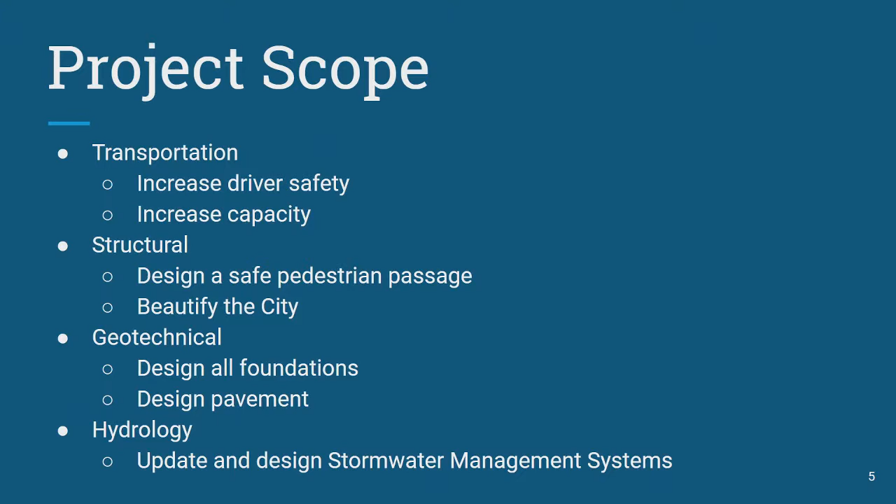Secondly, we were tasked with designing a safe pedestrian passageway through this intersection, which will be done through a bridge. The geotechnical aspects of this project are designing foundations and pavement for the new roundabout. And lastly, the stormwater management systems for the intersection needed to be updated.

So I wanted just to give a brief overview of how the current intersection operates. A lot of you probably use this intersection and maybe even used it today. This is actually a still from drone footage of the current intersection. Some things to point out that we're choosing to update with the intersection: for one, to the east here, you can see this long queue of cars waiting to turn left.

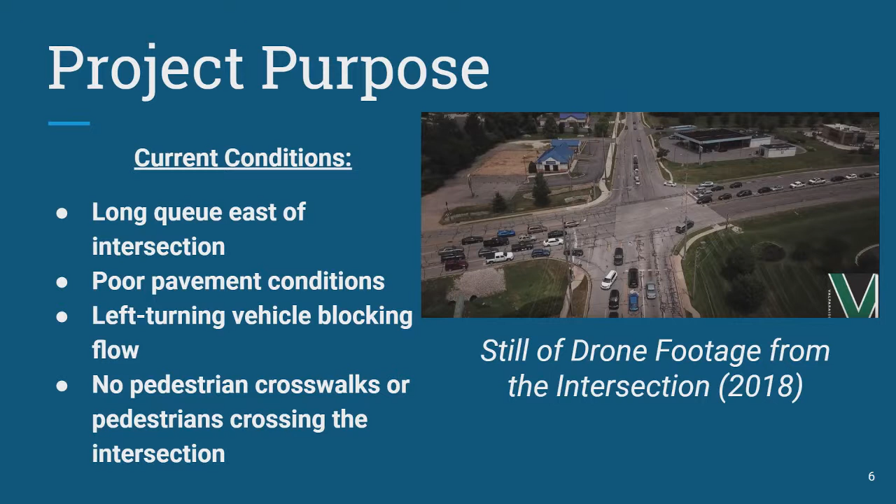You can see the poor pavement, which I'm sure a lot of you guys are used to here in Indiana, unfortunately. To the south, you can see that just off the page, there is a car that's trying to turn left that's actually blocking the flow of traffic, and it backs up into the intersection. And lastly, you can see that there are no pedestrians using this intersection. So all of these things are going to be remediated in our design.

So with that, I'd like to introduce the transportation part of this project. So why I chose to update this intersection to a roundabout, and a lot of you are probably thinking, why not just redesign the intersection? Why even make it a roundabout? Well, for one, using a roundabout, it's safer. As I said, there's a lot of crashes in this intersection. 37% of all crashes will be reduced because of this roundabout.

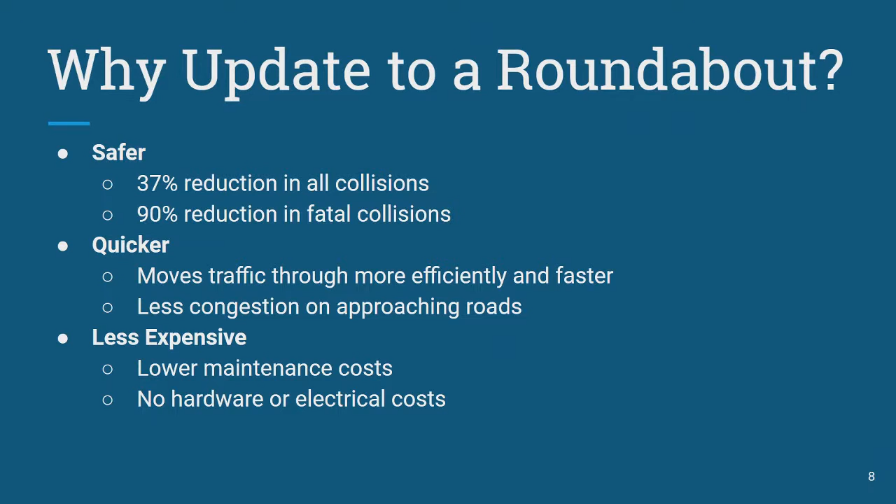The crashes that do occur will be at slower speeds, and they will be more rear ends than they will be T-bones. Also, roundabouts are quicker for the flow of traffic through the intersection. It's actually more efficient. And also, they're actually less expensive than typical signalized intersections because there are no hardware or electrical costs of the signals, and the long-term maintenance is actually lower.

So here's our layout design for the roundabout for this intersection. Just some things to note: the alignment of the roundabout ties in really well with the current road alignment. There are brick medians, as you can see, on all four approaches. This will prohibit that left turn movement that I was talking about, so vehicles can't block flows of traffic, which could then block the intersection.

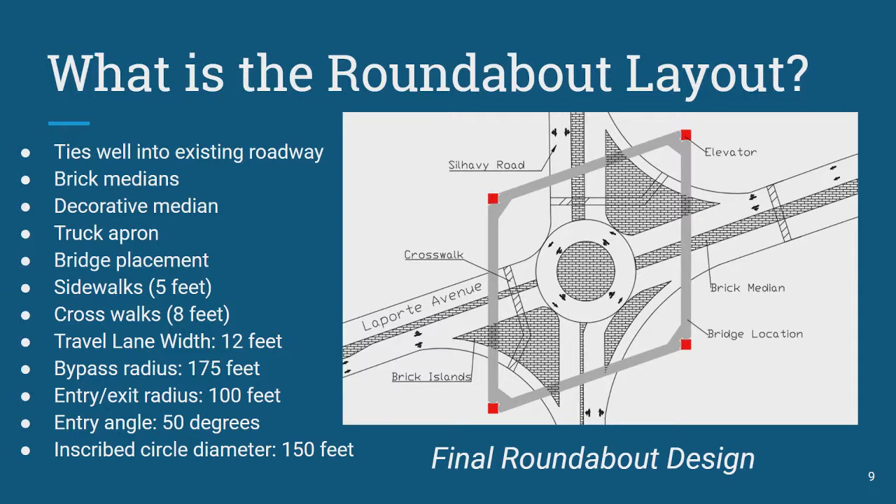There's also a decorative median in the center, which we'll use to also help beautify the city. And also there's a truck apron that many of you guys probably know about, that way trucks using the roundabout can mount the curb if they need to. Just some other things to note: this gray box is the bridge placement that our structural engineer will talk about, and it coincides really well with the roundabout design.

And just some dimensions here that I put just so you guys can see, but all of them comply with the informational guide on roundabouts. So just to give you an overview, how will this roundabout operate? We have this roundabout. How's it going to operate for a motorist? One thing that's checked with roundabouts is the fastest path.

Basically, when a motorist approaches the roundabout, they have 5 options of a turn movement to use in the roundabout. And we check to see what speed these vehicles will be traveling based on the geometry of your roundabout. And really, all this just shows that for all the different options, a vehicle wouldn't be traveling more than 30 miles per hour through this roundabout, which is very safe.

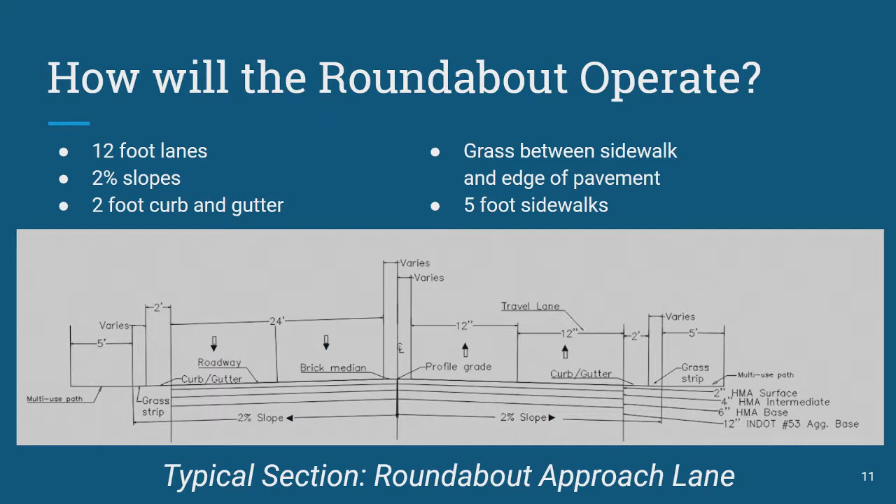I also just want to show you a quick typical section of an approach lane to the roundabout. Just some things to note: the lanes are typical 12-foot lanes. There's a slope on either side of them. There's a curb and gutter. There's a grass strip, and then you have the sidewalk. So all the pedestrians trying to get to the bridge around the roundabout are safely offset from the roadway. And with that, I'll pass it off to our structural engineer, Hannah.

Hello everyone, I'm Hannah Misch. I'm going to present the structural report. And to start the structural report, I'm going to give a background of what I considered before I came to the conclusion of my bridge, because you might see it and think that is kind of ridiculous.

So starting with preliminary design, our design criteria provided to us is that it needed to be ADA compliant, and that's compliant with the state. It needs to be handicap accessible, but also they wanted us to have a maintenance vehicle be able to access the bridge, to take snow off, clean it up and everything, but we ended up scrapping that criteria because it was really hard to design for. The bridges would have to be a lot bigger, wider, things like that to accommodate that weight. And we also considered safety, pedestrian safety, but also vehicle safety, location, connectivity, aesthetics, and constructability.

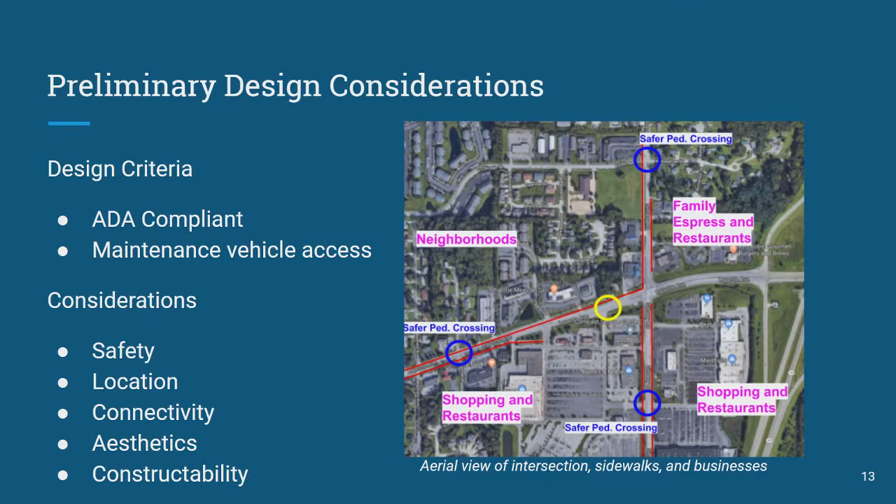So in this image, I included a view of our area, what we're trying to connect to, where the current pedestrian crossings are that are safe, because as we know, our current intersection is not a safe pedestrian crossing. And then I also have in red the current sidewalks where people can walk now. So we really wanted to connect the neighborhoods to the shopping centers, which is kind of why I settled on my design. Some of the things we considered was a truss bridge with a ramp system.

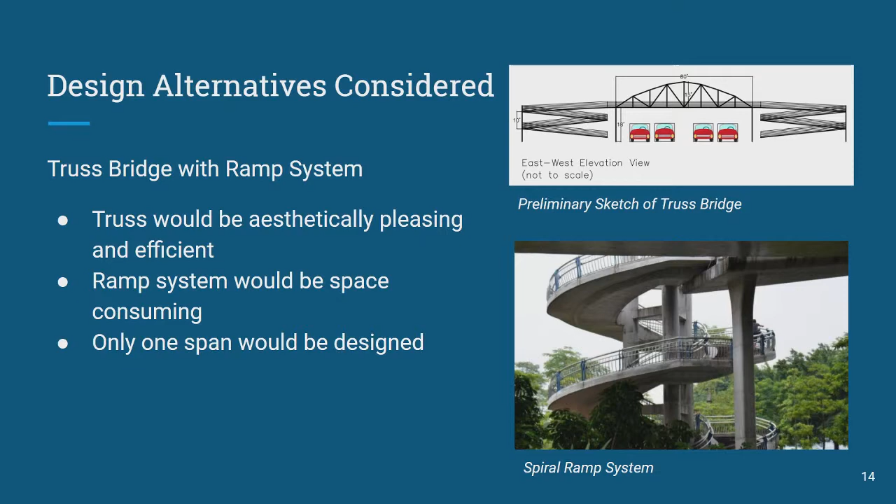The ramp system is ADA compliant, but because the bridge had to meet a certain height requirement, the slopes up to the bridge had to be at least 5%, but you'd really like them to be smaller than that. So the ramp would have ended up taking up a very large footprint, so we kind of threw that out, and also we only would have designed one span, so you can only reach from one side of the road to the other, and I just didn't think that was enough for what we're trying to get accomplished.

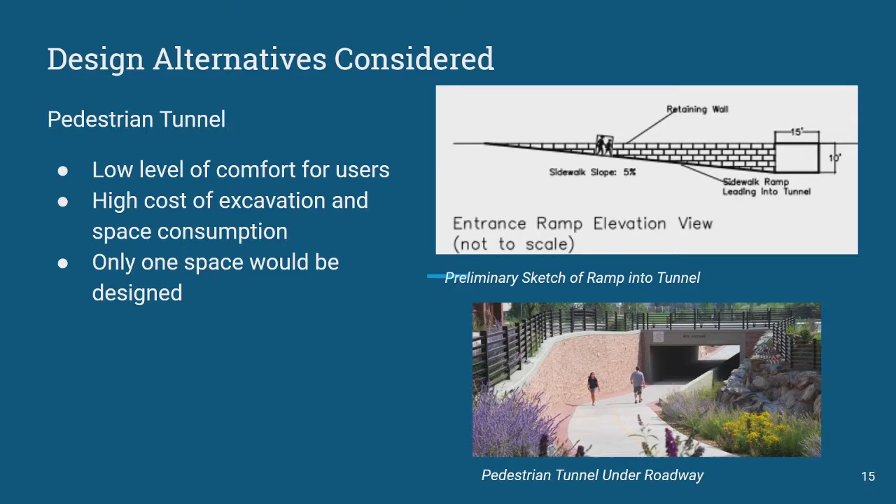So then we considered a tunnel. The tunnel has a low level of comfort for people using it. Tunnels are usually dark, so you have to have them a certain size so people don't feel cramped in them, and lighted and things like that. Also, the thing about tunnels is there's a lot of excavation involved. The construction would have been very extensive, and also, unless we wanted to do multiple tunnels, it only reaches one span.

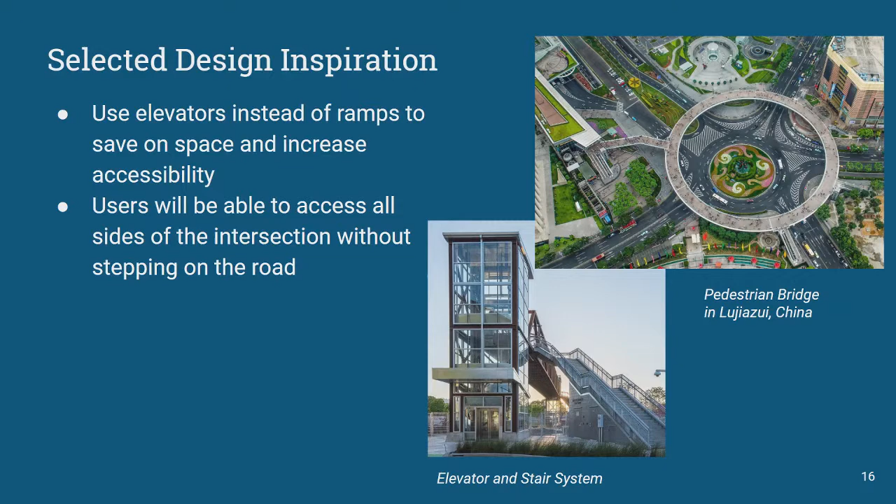So this is kind of what I was looking at. I was like, we're doing a roundabout, so why not do a roundabout bridge? I've never designed a circle bridge before, and it turns out I'm probably not going to learn that in my 4 years here, because that's much more grad school than I can do. So I'm like, how can I reach all four sides and still have it look really interesting? So then I started looking at that bridge, and also elevators to fix the space issue with the ramps. What I considered is 4 bridges.

This is very constructible because it is one single span, very long. We can construct each side one bridge at a time, and only shut down one entry to the road. We could just tie the bridge into the columns very easily, and that way we can connect the elevators, and everyone can walk around the bridge to all the sides. Each span is 200 feet. In order to design this bridge in the time that I had, I made all spans identical. If we had more time, I would have been able to make some of them different.

That way we could minimize the footprint a little bit, but I couldn't do that in a semester, so this is what we did. So for the material, I'm not gonna go too far into my analysis, even though that's what I spent my time on, because that's not really gonna appeal to my audience. So we're going to talk a little bit about the aesthetics.

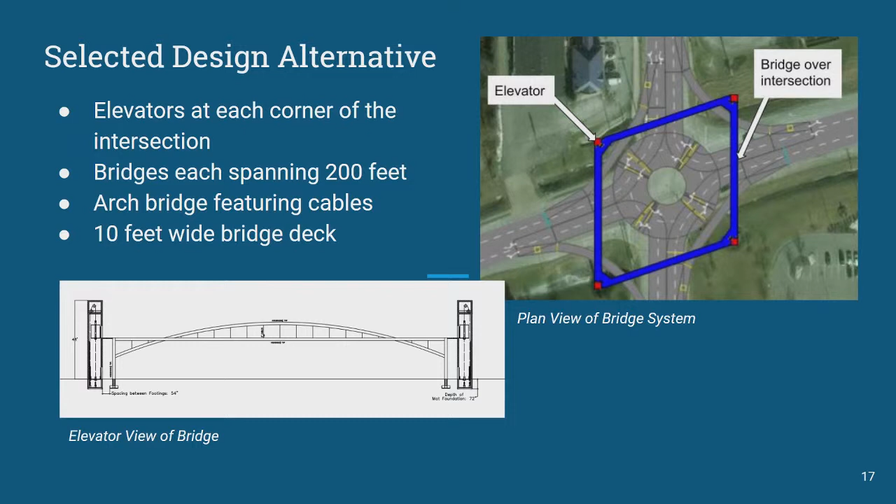I chose HSS sections, which are like squares or rectangles. That way the bridge has a really clean look. If you go back originally to the bridge design, that arc's actually very slim. From the top of the bridge deck to the top of the arc, it is 10 feet. That's not a very tall arc. So I wanted to keep the entire view of the bridge very slim and appealing. That way it's not hugely distracting for the drivers.

So I did HSS sections, I chose weathered steel, that way we can give it a really nice industrial look, and also there's no maintenance involved with weathered steel. You don't have to paint it, so we don't have to worry about that, and it gives it a really cool vibe.

And also the bridge deck, I designed corner decks around the elevator, so there'll be a deck connecting the elevator eventually, but there's decks so that we can set benches on there, people can wait for the elevator, they can kind of hang out there and look at the cars going through the roundabout and things like that. And I'd like to introduce the geotechnical report.

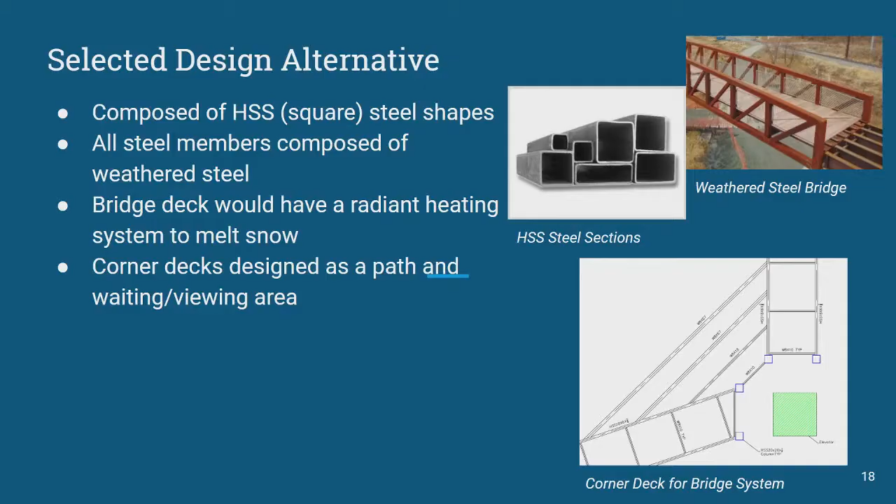Okay, now let me introduce the geotech design. For the design criteria, all the foundations were designed to follow ASCE 7 and ACI 318R-14 design code. And a factor of safety of 2.5 was used in this design. And the designed foundation will not settle more than 1 inch. And also angular distortion and bearing pressure were considered.

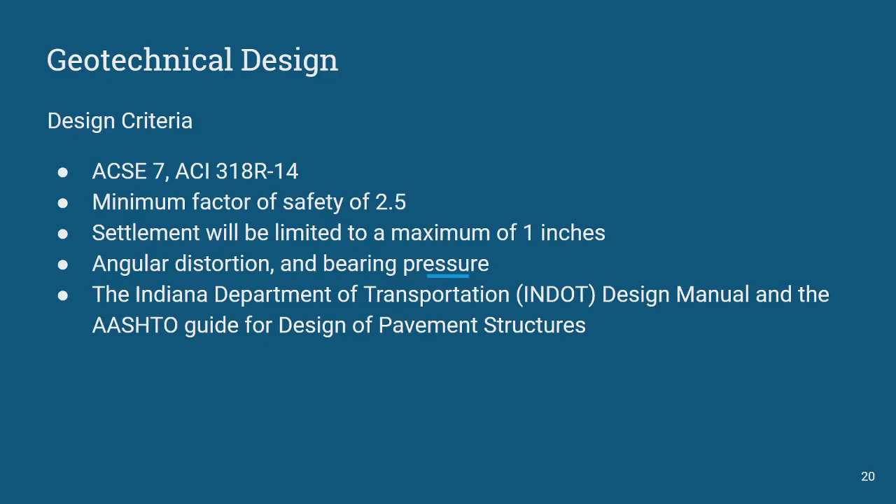The angular distortion is the differential settlement between 2 foundations related to the spacing. And the bearing pressure of soil is its ability to carry load of structure without excessive settlement. Also, the pavement design will follow the INDOT design manual and the AASHTO Guide for Design of Pavement Structures.

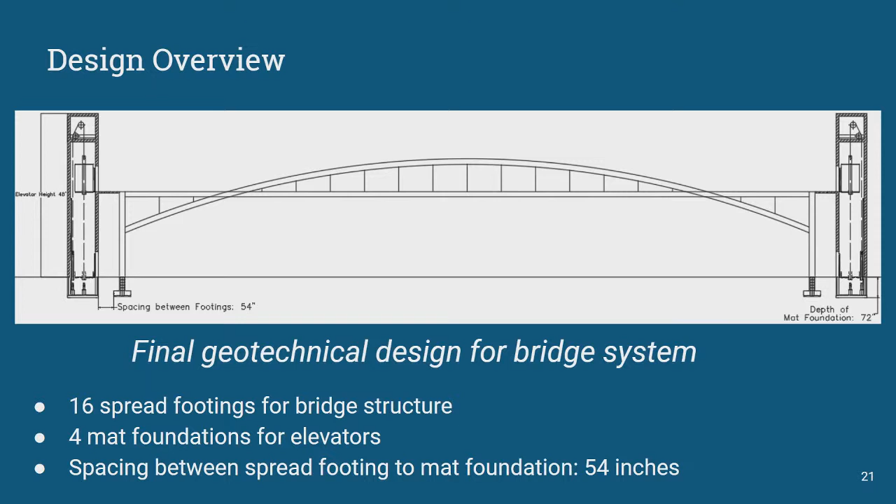Here is the final geotech design for the bridge system. A total of 16 spread footings will be used in the bridge, and 4 mat foundations are required for the elevators. For constructability, all the spread footings were designed the same size, and all the mat foundations were designed the same size. Spacing between the spread footing and mat foundation will be 54 inches.

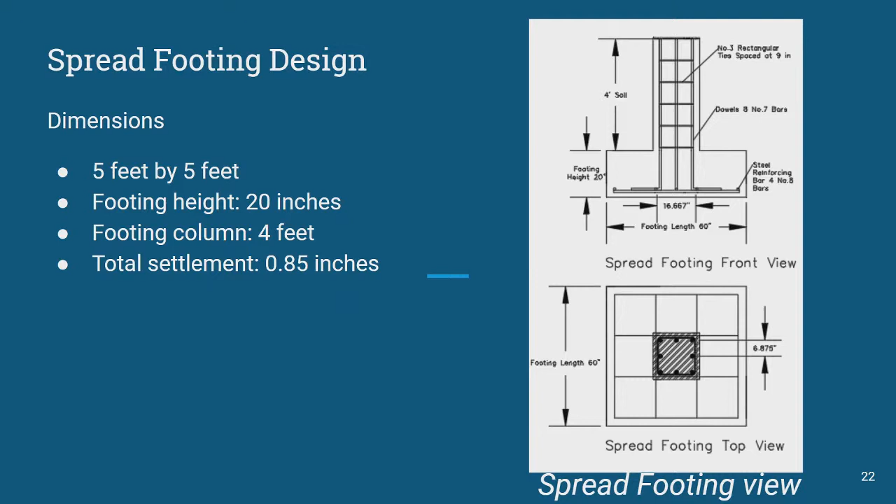For the spread footing design, based on our structural engineer's assumption of the structure load, the dimension required for the spread footing will be 5 feet long by 5 feet wide. And the depth of footing will be 20 inches, and the column will be 4 feet. This size footing results in a total settlement of 0.85 inches, which is within the 1 inch settlement constraint.

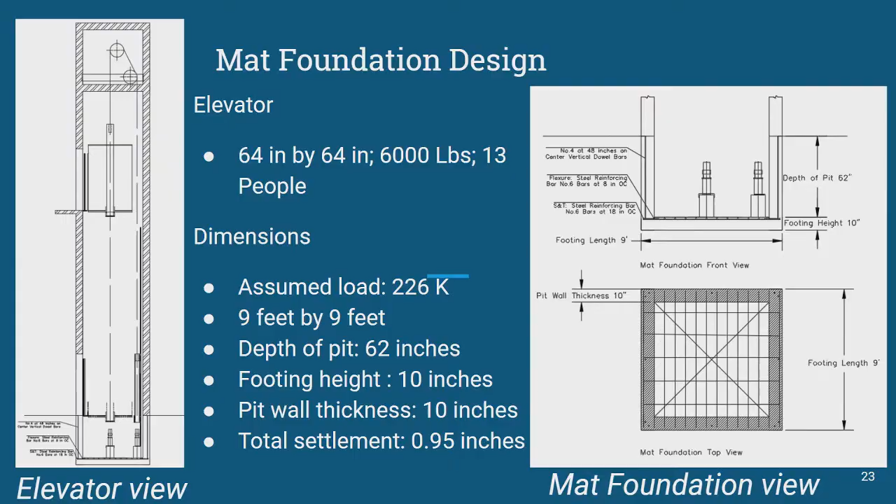For elevators, we will purchase an entire elevator system. The elevator car will be 64 inches long by 64 inches wide, and the total equipment weighs 6,000 pounds. Also, for this elevator, the maximum passenger capacity will be 13 people. Based on this elevator size, there will be around 226 kip force on each mat foundation. The dimension required for the mat foundation will be 9 feet long by 9 feet wide.

Also, the depth of pit will be 62 inches, and the height of mat foundation will be 10 inches. That means the total height of this mat foundation will be 72 inches. Also, the thickness of the pit wall will be 10 inches. This mat foundation results in a total settlement of 0.95 inches, which is within the 1 inch settlement constraint.

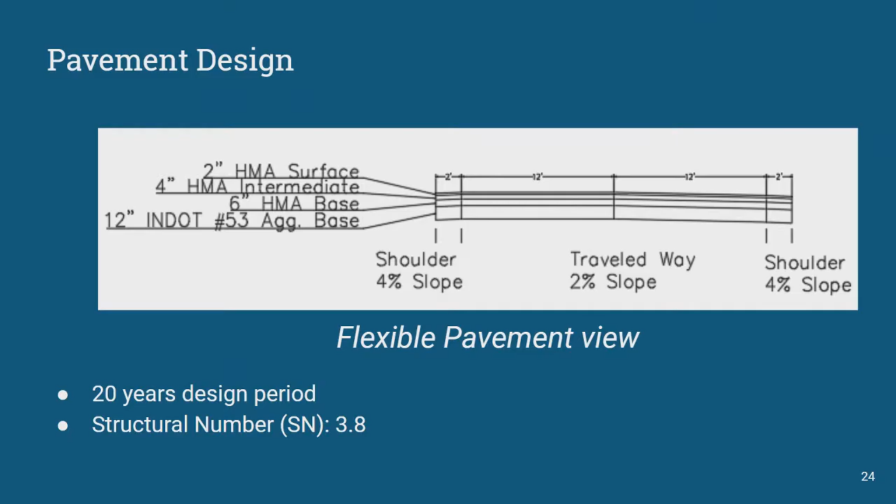For the pavement design, we assume a 20 year design period, and a structural number of 3.8 was used in this design. Finally, we decided on 2 inches HMA surface, 4 inches HMA intermediate, 6 inches HMA base, and 12 inches number 53 compacted aggregate base. Now let's pass to Owen to introduce the water resources.

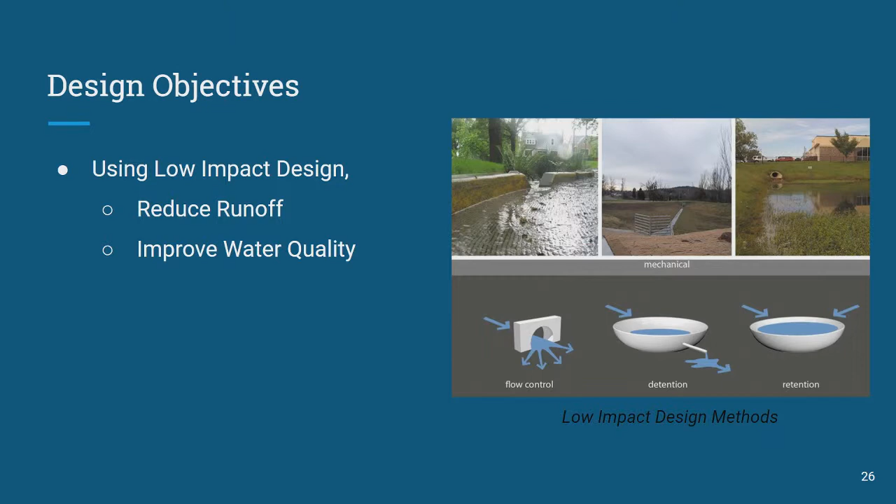Thank you, William. So for the hydrology portion of this project, the primary goal was to use a low-impact design so that we could reduce stormwater runoff at the site as well as improve water quality of this runoff. Low-impact design is basically a design that naturally infiltrates, detains, retains, or evaporates stormwater with minimal impact on the surrounding environment.

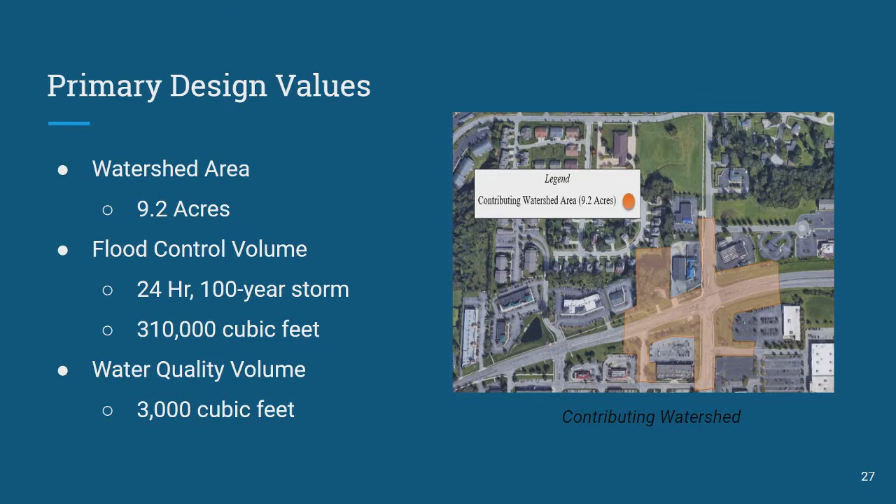So in order to start this process, I first had to find how much water was draining into the site. I did this by getting some spot elevations and finding a contributing watershed, shown here in orange, of about 9.2 acres. Using this area, I was able to find the flood control volume, which is basically the amount of runoff to expect during a storm event that my system needs to be able to handle. Using the 24-hour 100-year storm event, I found a runoff of about 310,000 cubic feet. Then for the water quality volume, or the amount of stormwater runoff that needs to be treated at the site, I found a volume of 3,000 cubic feet, so a much smaller value.

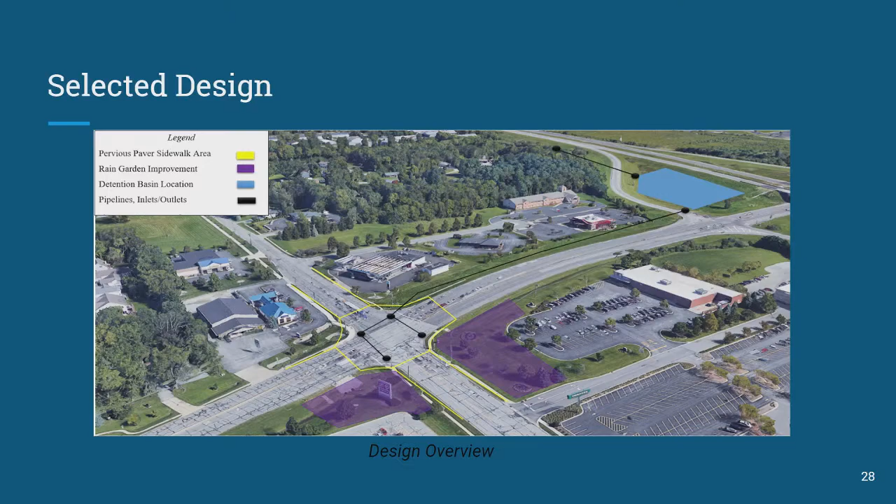Moving into my selected design, I decided to go with a detention basin just west of State Road 49, shown here in blue. Along with this detention basin, I needed stormwater sewer pipes to take the stormwater from the site to the detention basin. Those are shown here in black. For the water treatment, I decided to go with pervious pavement, shown here in yellow, along the roundabout. And also to aid this, I proposed rain garden vegetation improvement to the south of the intersection, shown here in purple.

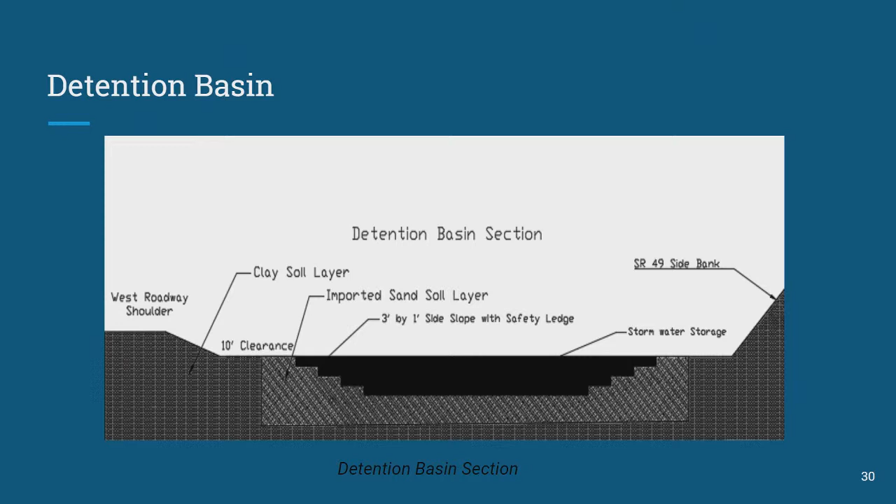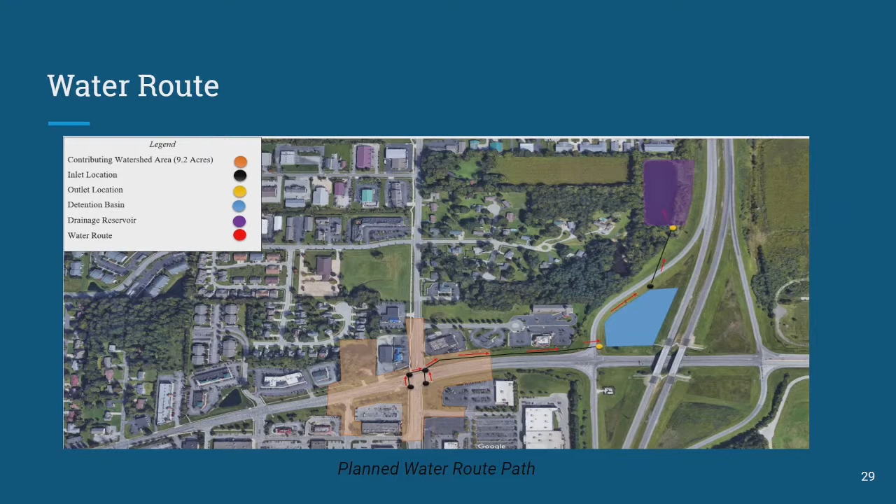As for my detention basin design, a few of the major requirements that I had to deal with in designing this were a max depth of about 4 feet and a 3 to 1 minimum side slope. I also needed adequate clearance of 10 feet between the 2 existing roadways surrounding the detention basin. From there, I went into storm sewer pipe design. With this, there were 5 concrete pipe segments. As you can see, there are 3 around the intersection, 1 leading to the detention basin and 1 more to the north. These segments totaled about 2,000 linear feet of concrete pipe.

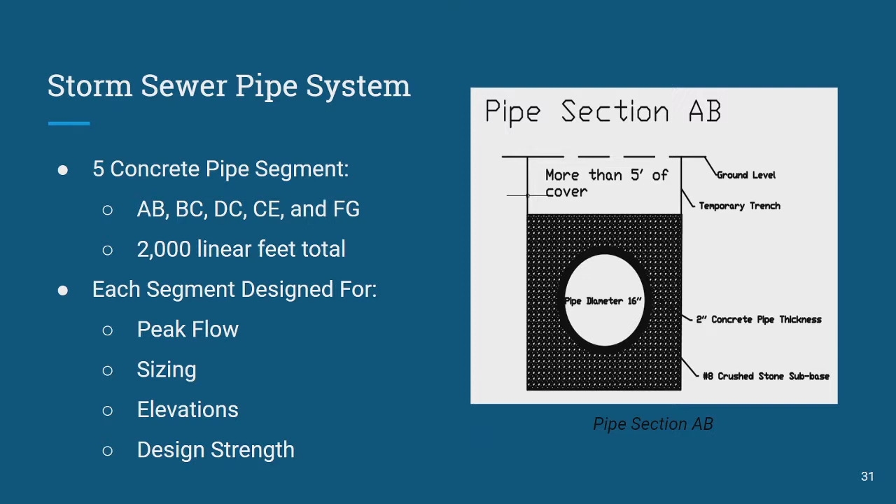For each pipe, I had to design their own peak flows as well as sizing their diameters. These diameters of the pipes range from 16 inches to 36 inches. I also designed for the invert elevations as well as the design strength of each pipe so that it could hold the weight of the pavement, the soil above it, and the live load of the traffic that would be over the segments.

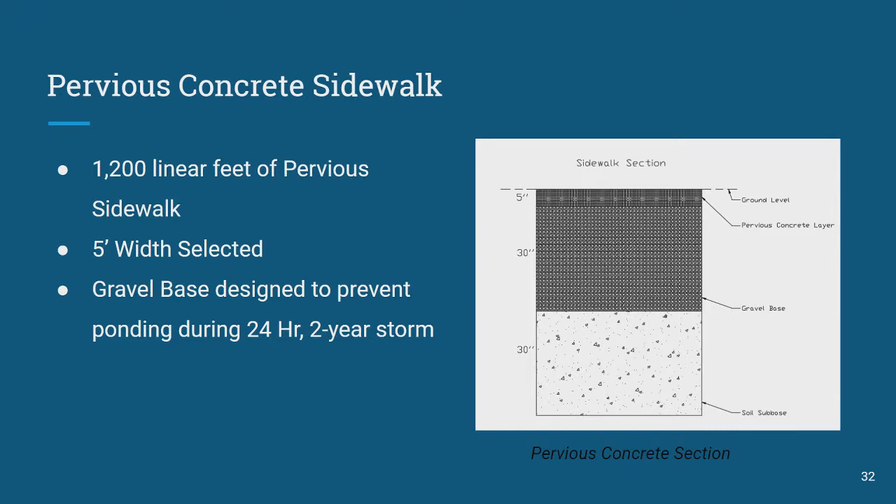The final major part of my design was pervious concrete sidewalks. I saw that I needed approximately 1,200 linear feet of pervious sidewalk. Based on design requirements, I selected a 5-foot width for these sidewalks, and then from there I used an Excel program to iterate for a gravel base depth that would prevent ponding during a 2-year 24-hour storm event. This Excel gave me a gravel base thickness of 30 inches, shown here in this graphic.

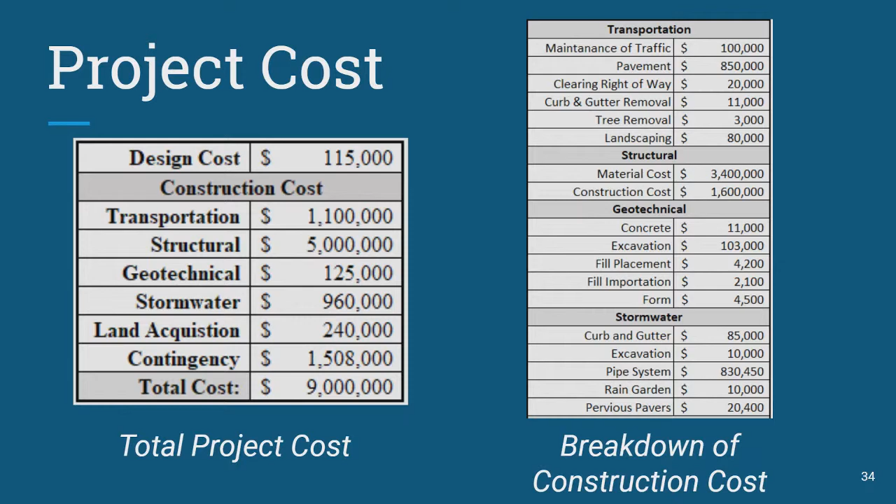To summarize, we went over the project introduction, each discipline gave their overall design report for the project, as well as a cost summary for our project. Now I'd like to invite up my colleagues to answer any questions that you might have.

Yes, sir. Did you compare the existing level of service at this intersection to what would be anticipated with the roundabout? It's currently at a D or C, I believe, and with the new roundabout, because of the software that we have, instead of using a level of service, I calculated it based on a volume to capacity ratio, which was about 0.6.

Yes, sir. Do you anticipate buying new right-of-way to build your project? Yeah, part of our cost is definitely land acquisition. That's for both the transportation aspects and the stormwater aspects. We had to acquire land. How much? 9 acres? Yeah, 9 acres.